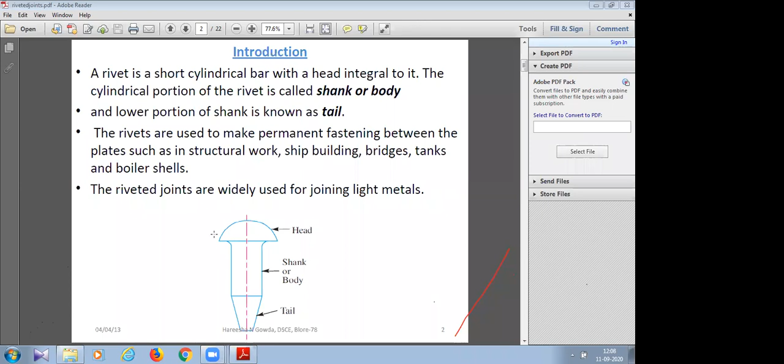Thank you. Okay. So the rivet consists of the diameter. In the examination, they give you the diameter of the rivet. If it is not given, you can assume this diameter. The diameter of the rivet means this diameter, body diameter or shank diameter. This is 18 mm. So from the central axis, 9 mm this side, 9 mm this side, you can assume if it is not given. If it is given, draw as per the size that is given, 12 mm or 14 mm or 18 mm or 16 mm.

Usually for snap head, that is the normal rivet that you use, the head diameter is 1.6D. If D is 18 mm, this is 1.6D head diameter. That is standard. That you will see in the next slide. So a rivet is a short cylindrical bar with a head integral to it. The cylindrical portion of the rivet is called shank or body, and the lower portion of the shank is known as the tail.

Rivets are used to make permanent fastening, as I told, a permanent joint between the plates, such as structural work, shipbuilding, bridges, tanks, boiler shells, AC work. For all these purposes, you use rivets. Riveted joints are widely used for joining light metals. So next slide.

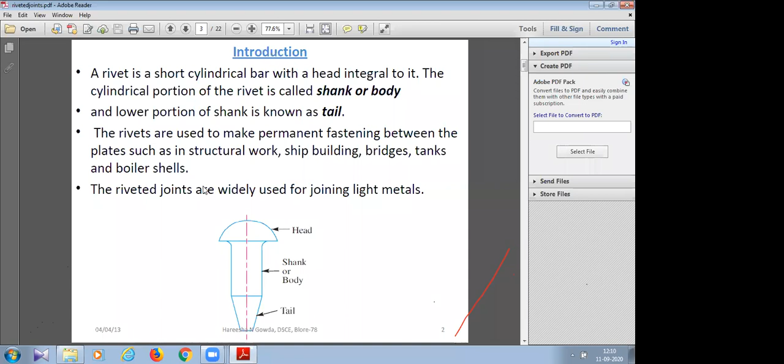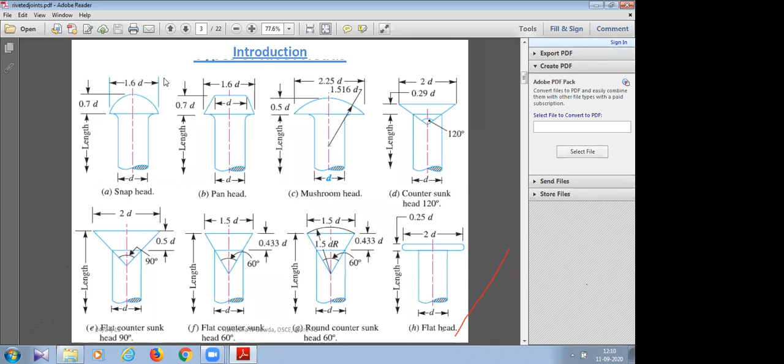So 1.6D is the rivet head size. D is the rivet diameter, and the height of the rivet head is 0.7D. This you have to remember. No one gives you these sizes 1.6D, 0.7D in the examination. The first figure A, that is the snap head, you have to remember the nomenclature.

Head diameter is 1.6D. You will be given in the examination only the rivet diameter, small d. Based on small d, you have to calculate the snap head diameter, 1.6 into 18 mm, and the height 0.7D. This particular figure A is very important to construct all the riveted joints. Try to memorize these three. Head diameter is 1.6D, height is 0.7D.

Length is nothing but the plate thickness. It sits in the plate, so length is nothing but the thickness of the plate. Above the plate, you will have the head. In the plate, you will have the rivet, which you will see in the joint in the next slide. This is the pan head, having this feature: 1.6D and 0.7D, slightly tapered. You can see the bevel shape here. This is the pan head rivet head.

This is the mushroom head. The head is different. 2.25D is the diameter of the head. 0.5D is the height of the head. Countersunk: you can see the tapered portion here, 120 degrees. This is a countersunk head with 120 degrees angle. Flat countersunk head, this is 90 degrees angle. 2D is the head diameter. 0.5D is the height of the head. Flat countersunk head with 60 degrees included angle.

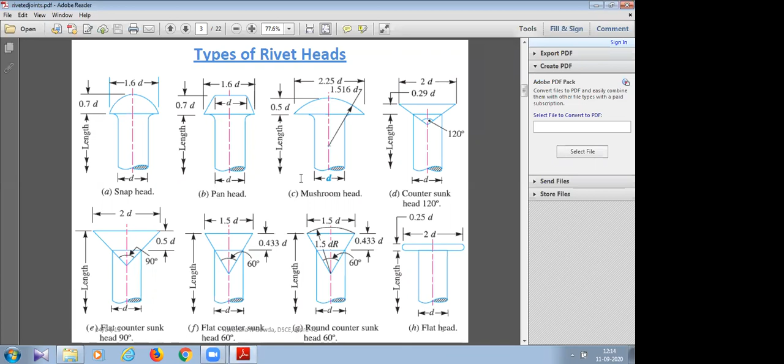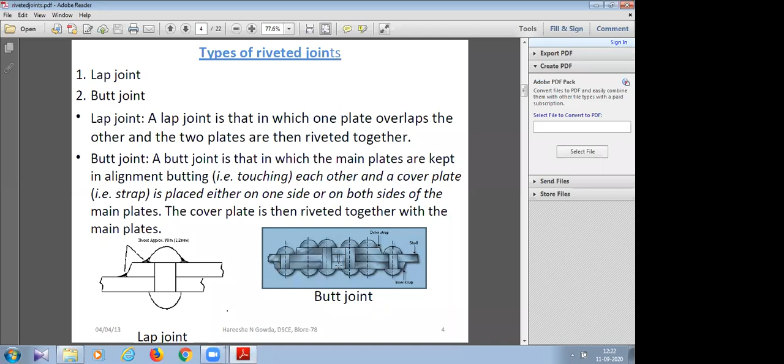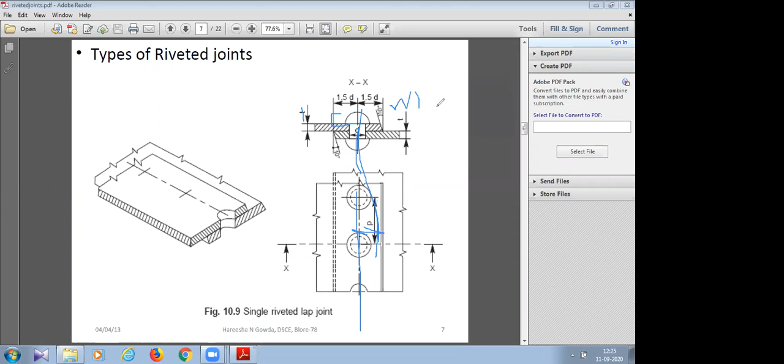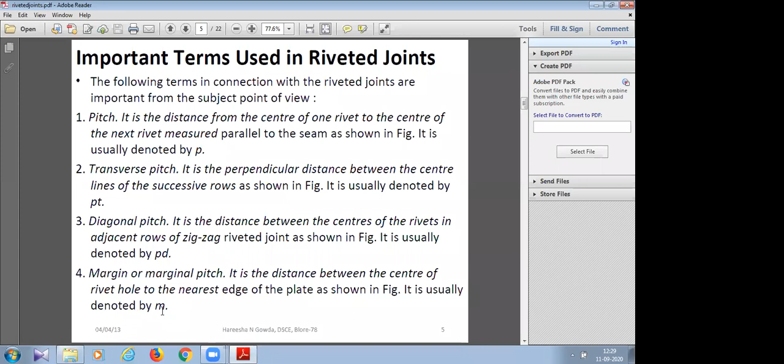So now you have understood all these four terms. First one is pitch, second PT or PR, whatever it is. Third one is diagonal pitch, PD. Margin means from the plate edge to the axis of the rivet, it is called margin. Edge of the plate to the axis of the rivet, that is called margin or marginal pitch, denoted by small m. Let us go to the calculations part.

Thickness of the plate will be given to you in the examination. T is thickness of the plate, 8 mm or 10 mm or 12 mm. Assume it if it is not given, within these three sizes, 8, 10 or 12. And the diameter of the rivet, small d, is 6 root T. If d is not given to you in the examination, diameter of the rivet hole, if thickness is given, you can calculate d using this formula, d equals 6 root T. If T is known, you can calculate d.

Similarly, distance of the center of the rivet from the edge of the plate is 1.5 d. Margin m equals 1.5 d. If margin is not given, assume it as 1.5 d, 18 mm if d is 12 mm. Longitudinal pitch p equals 3d. Transverse pitch PT equals 0.8 p for chain riveting.

Chain riveting means on one axis, all the rivet holes will be there. First hole, second hole, third hole. This is called chain riveting. Zigzag you have seen just now. There will be two axes. In the first, 3 rivets; on the second axis we will have only 2 rivets, intersecting with each other at the middle point. In that case, transverse pitch PT equals 0.6 p.

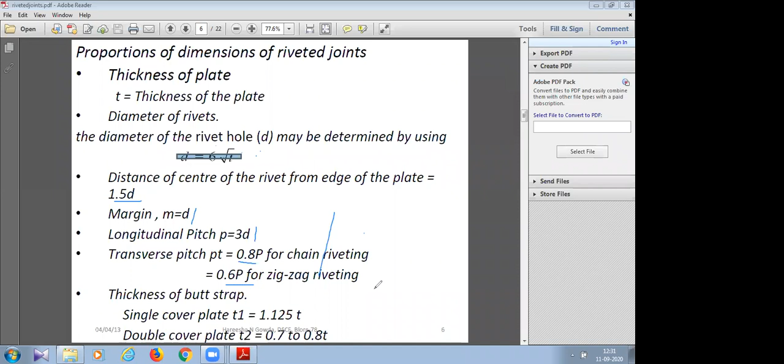Thickness of the butt strap: when you have the butt joint, thickness of the bottom plate T1 is 1.125 times the thickness of the middle plate. Double cover plate, top plate T2 is 0.7 to 0.8 T. That is the range of the thickness of the plate T2; you can take the higher, 0.8 T. If you know the thickness of the middle plate T as 10 mm, bottom plate T1 is 1.125 into 10 mm, top plate T2 is 0.8 into 10 mm, 8 mm. Bottom plate is 11.25, top plate is 8 mm, middle plate is 10, the actual plates that you are joining.

Any doubts so far? Shall I proceed to the next slide? Hello? No doubts. No doubts, sir.

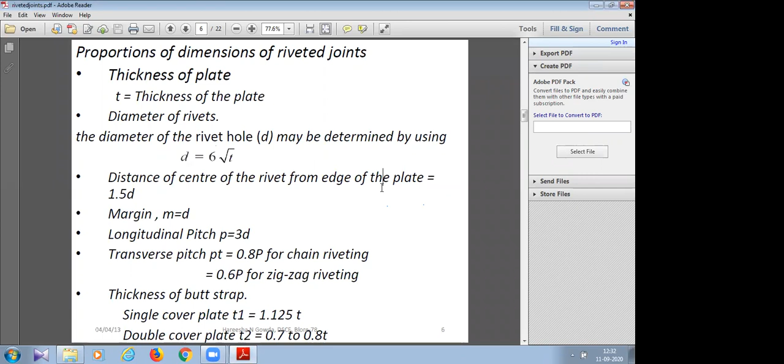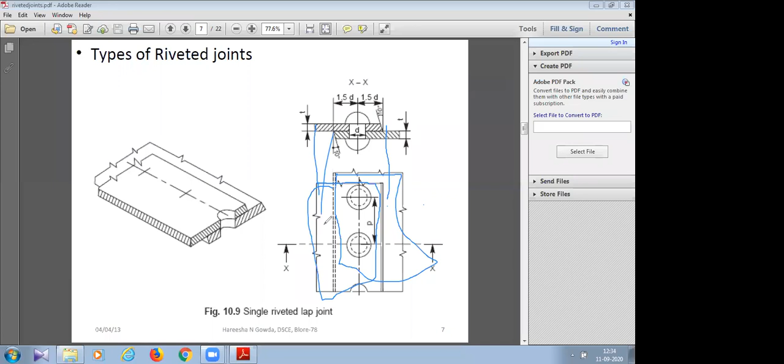So this is first plate. This is second plate. Where did these two come from? Projections. These are projections. So this is not visible. So this is one point, this is second point. That is why these two dotted lines are shown here. So I am projecting this point and this point to get these two lines.

And this is this line. This is this line. This is this line. And this is this line. So you get this view. This is lap joint because plate number 1 is overlapped on plate number 2. This is plate number 1. This is plate number 2. So they are overlapped.

Why is it called single riveted? Only one rivet on the axis. There is no second line. Why is this called chain type? Because all the rivets are on one line only. This is called chain type single riveted lap joint. There is no second axis here.

Any doubts in this? Is it okay? Okay, sir. Okay.

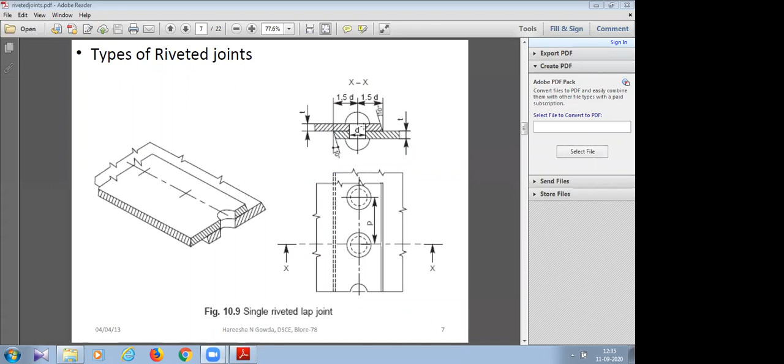Double riveted chain type lap joint. Why is this double riveted? Two rows. Yes, sir. This has two rows, double riveted. That is why this is double riveted. If it is one row, it is single rivet. Why is it a lap joint? One plate is overlapped on the other plate. Two plates are kept one above the other, overlapped. That is why this is called lap joint.

Why is this called chain? All the rivets are on the axis. There is no zigzag arrangement of the rivets, like you will see in the next slide. All the rivets follow one line. That is why this is called chain. So this is the first rivet axis, this is the second rivet axis, and this is P, the distance between the two rivets, and this is PR, the transverse distance between two axes of the rivets. That is from here to here. This is PR.

This is D, diameter of the rivet. That is nothing but this diameter of the rivet. This is 1.6D. That is nothing but this outer diameter, the head diameter. This is PR. And this is the thickness of the plate T. This is the thickness of the second plate T. This is projection. This line, and this line, and this line, and this line.

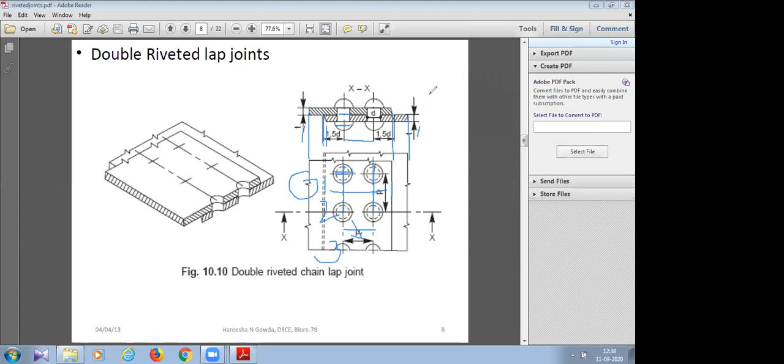Okay, is it okay? Okay, sir. Okay. So this is called double riveted chain type lap joint.

Next, double riveted zigzag lap joint. Exactly the same figure as what you have seen. The only difference is zigzag, sir. Zigzag arrangement. Exactly. They are not in one line. The first row is on one axis. Second row, I will show you. So the middle point of this, if you take the mid of this, you get this axis on the second axis line. So this is zigzag arrangement. You can see the middle of these two rivets is this one.

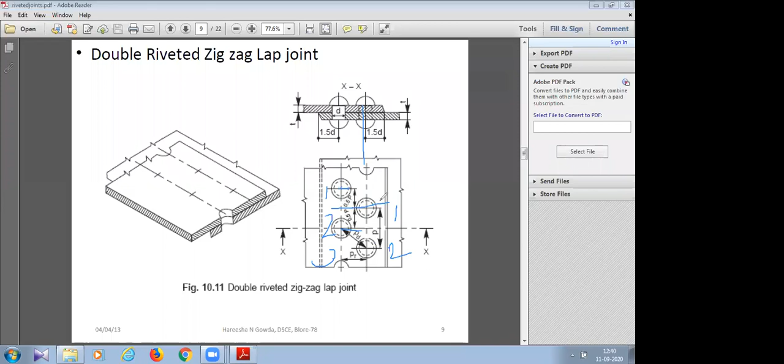So on the first line you get first rivet, second rivet, third rivet. Here you get only two rivets, 1 and 2, on this line. So they are arranged zigzag. So this is called zigzag. Why is this called double riveted? Two rivet axes, 1, 2. Why is this a lap joint? They overlap. Why is this zigzag? They are kept in zigzag arrangement.

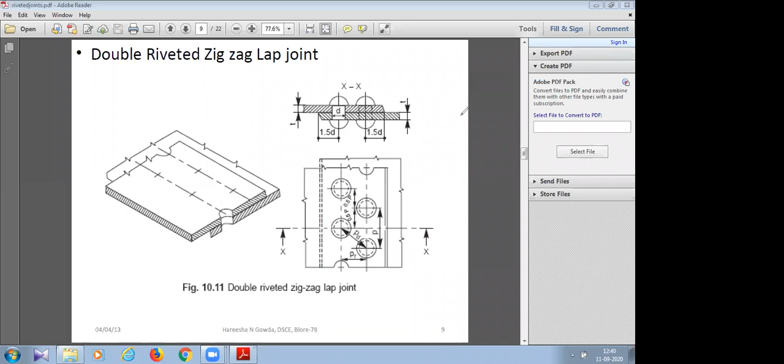Is it clear? The name itself implies what you have to draw. So he will ask you to draw a double riveted zigzag lap joint. The name itself indicates what you are supposed to draw. Is it clear? Yes, sir. Clear, sir. Name itself indicates. No need to learn by heart. This is double riveted zigzag lap joint.

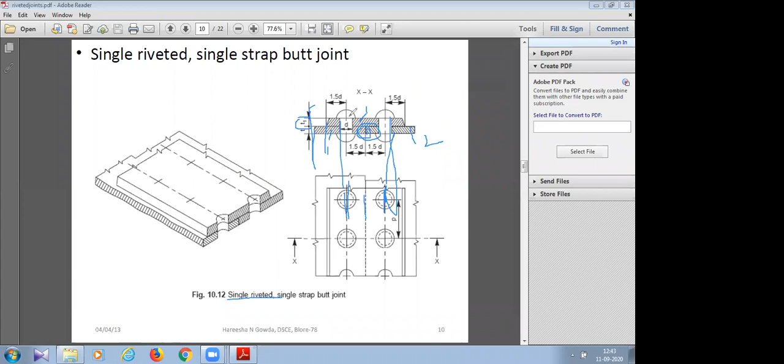So just projections. You get these lines from the top view to the front view. So D and 1.5 D. Any doubts in this? No, sir. Okay, let us go to the next type of joint. Single riveted double strap. You can see here. The only difference is two plates are kept one above the other on the middle plate.

This is the butt joint, only at the middle portion. This is not extended to this portion. Joint is not here. They are full supporting plates, full plate, no joint. Here also full plate. So this line should not be extended to this and should not be extended to this. This is only at the middle. That is why, to demarcate the identification, hatching in one direction. Hatching you can draw in the other direction. For this also you can draw it in the other direction. I will show you on the board.

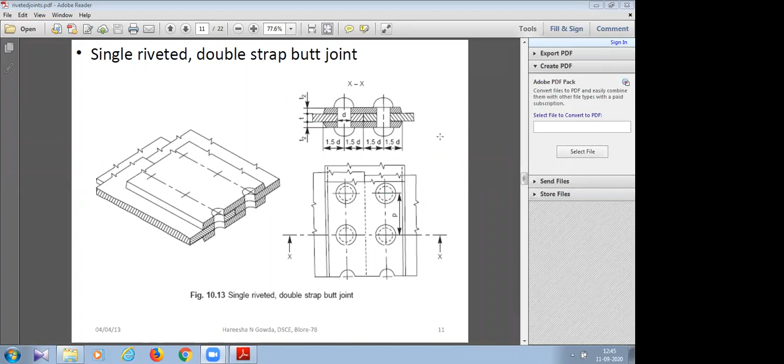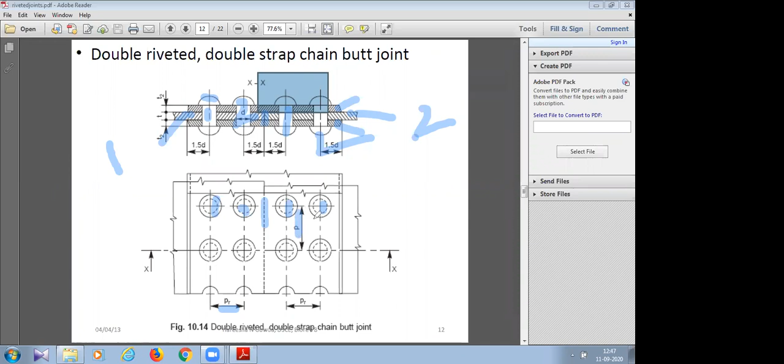So why this is chain? You can see they are on one line. Double riveted, double strap. Why this is double strap? This is one strap, this is second strap. Strap 1 and strap 2. So this is rivet diameter. This is head diameter. And this is PR, distance between the two rows. And this is P, vertical, from one to other rivet. Is it okay? Okay, sir.

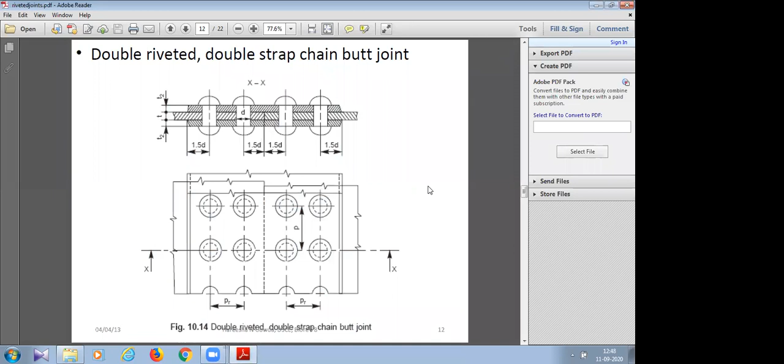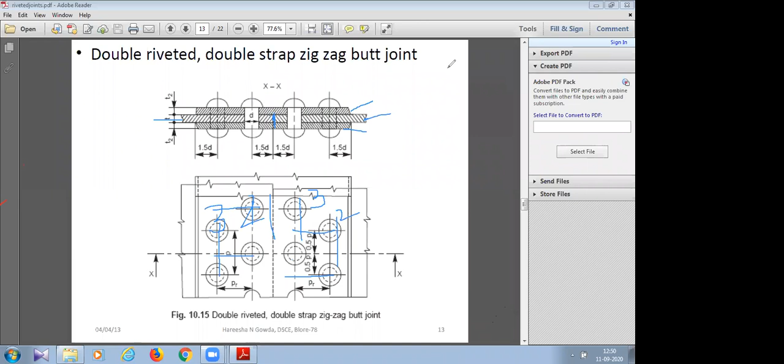This is double riveted, double strap, zigzag butt joint. Any doubts? Is it clear? Clear, sir. Okay. That ends the presentation. 1 minute. We will go to the syllabus.

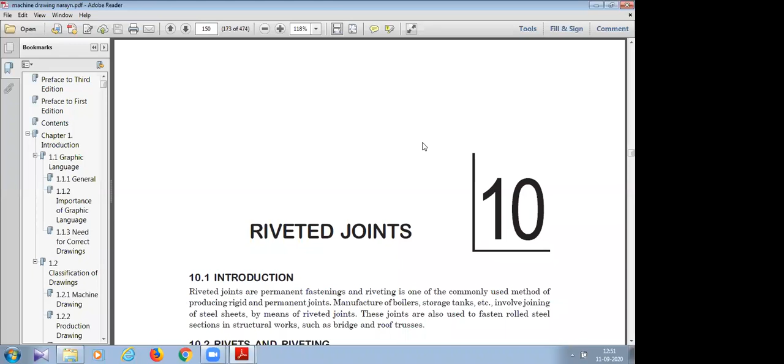Take the screenshot of the figures that we are supposed to draw. KL Narayana textbook or ND Bhatt, whatever you are having. So this is the first figure that you have to draw. Figure 10.3, types of rivet heads.

Stop your videos. 326, stop your video. 326. Hello. Yes, sir. Stop your video.

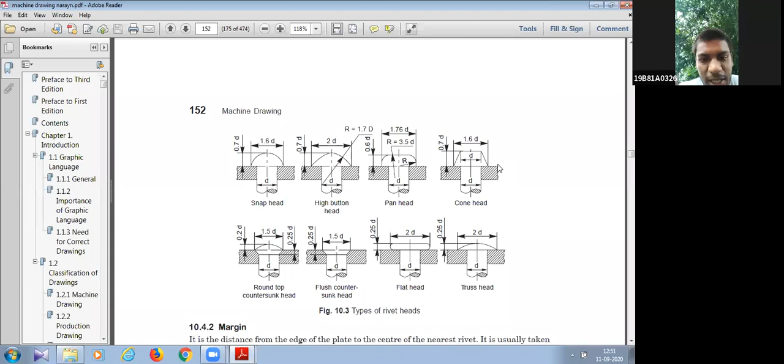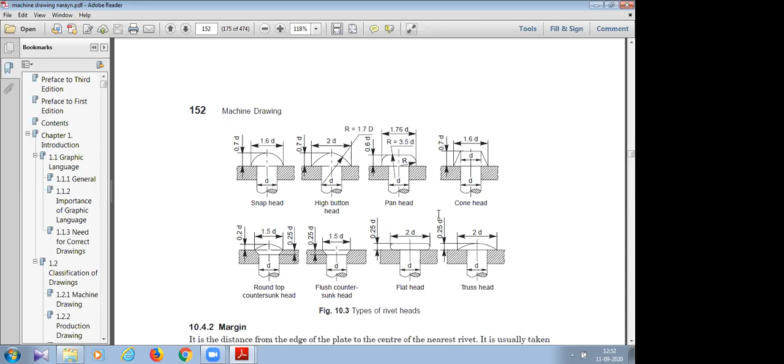Okay, this is the first figure that you have to draw. Figure 10.3, types of rivet heads. Take the snapshot, or I will share it in the WhatsApp group also. Is it okay? Okay, sir. All these rivet heads you have to draw. Take D as 18 mm. Calculate the remaining and draw it. Okay? This is the first figure. Second figure, 10.9, single riveted lap joint. You need not draw this figure.

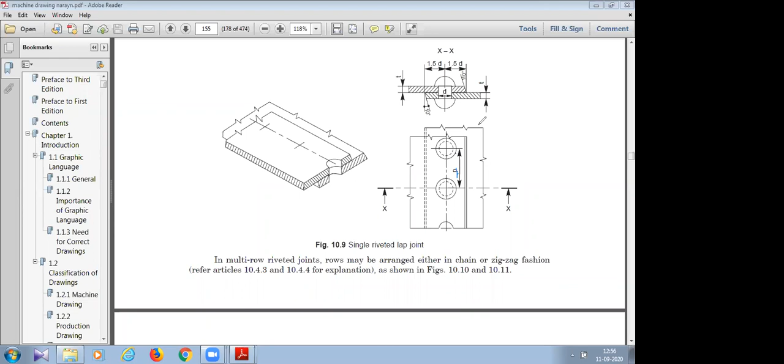Thickness of the plate, take it as 10 mm. Okay? Okay, sir.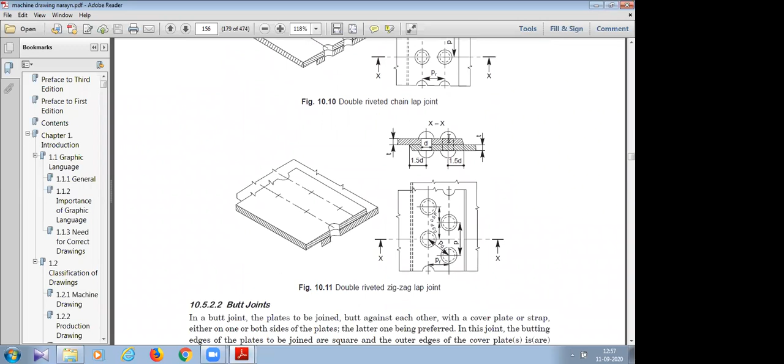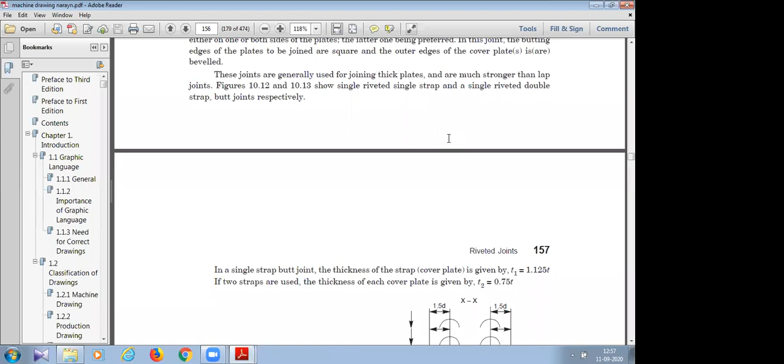Next 10.11, double riveted zigzag lap joint. You have to draw this figure. Okay, sir. Next this figure 10.12, single riveted single strap butt joint. This figure you have to draw. Next this figure, single riveted double strap butt joint, 10.13. Okay, sir.

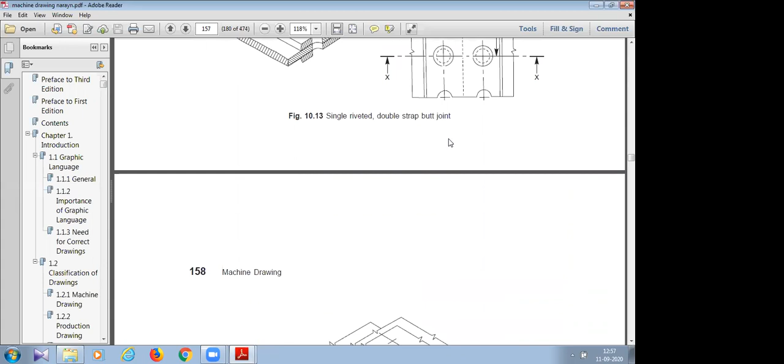Next last figure, double riveted double strap chain butt joint. This figure you have to draw. Okay. One more figure is there. Last figure, 10.15, double riveted double strap zigzag butt joint.

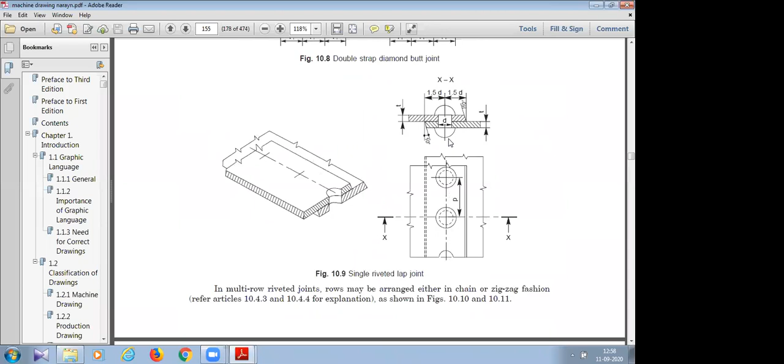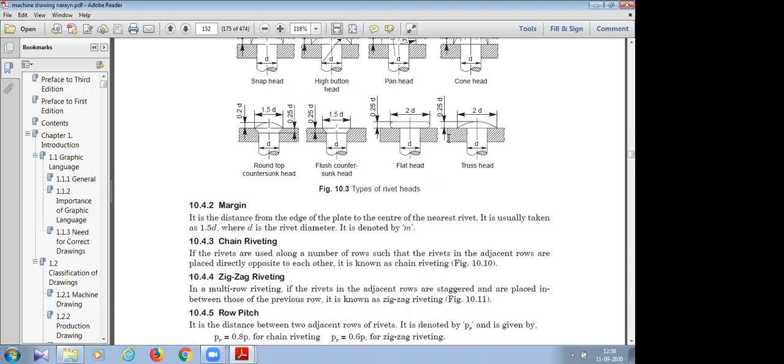Yes, sir. You have to draw all these 8 figures for third sheet. Submission date.